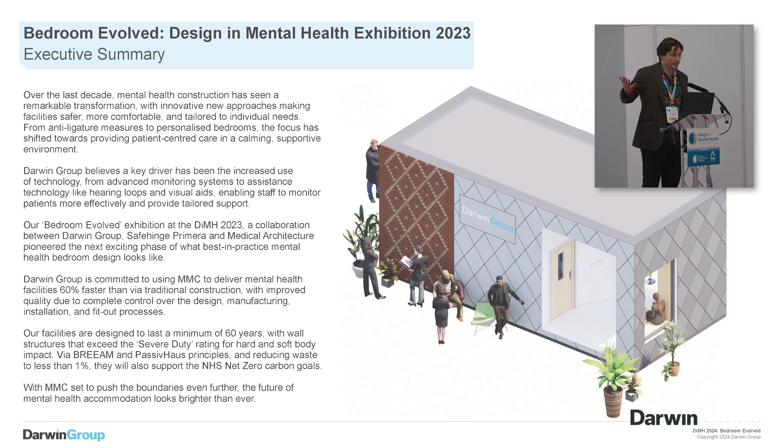We can provide this as a completely off-site build, which is not typically what we do, but is entirely sensible for the need. The benefits of fitting this inside one module that can be fully fitted out in our facilities in Shropshire and put on the back of the lorry and craned into site, saving vast amounts of time and ultimately getting much closer to patient care much quicker.

The interior of the room, we worked very closely with Medical Architecture last year, and I can't thank them enough for the brilliant input that they had in developing what is effectively still the blueprint of the design this year.

It was built on the back of the Procure Functional Single Bedroom Type 1 standard, and here you can see a very sketchy overlay of the Procure standard room in red and what we've now got as the colourful underlay underneath it.

So you can see that we're not really trying to reinvent the wheel here. We're not trying to do anything that isn't built on what is already a tried and tested solution. It's just about building it, delivering it and learning more from that.

This is, well, that's my hand. This is kind of the kit parts puzzle piece approach to what I'm trying to push at what we do at Darwin Group in terms of creating design and standardized designs where it makes sense.

I come from a background working in architecture, not working for a contractor. So I'm very aware of the limitations of working in an architect practice, but also the benefits we could have from a contractor side with a design instinct to develop spaces that de-risk and create standardized components where appropriate. We really see this as one of numerous standard components that we're currently developing, with the key idea that they are repeatable, we can de-risk them, and they're appropriate for the environment.

This is really how we see it working viably as an economic solution. The fact that we could deploy these very rapidly as a complete kit of parts that would very quickly create a ward environment of bedrooms. Not suggesting that this is how you want to arrange them, but potentially it's not a terrible idea.

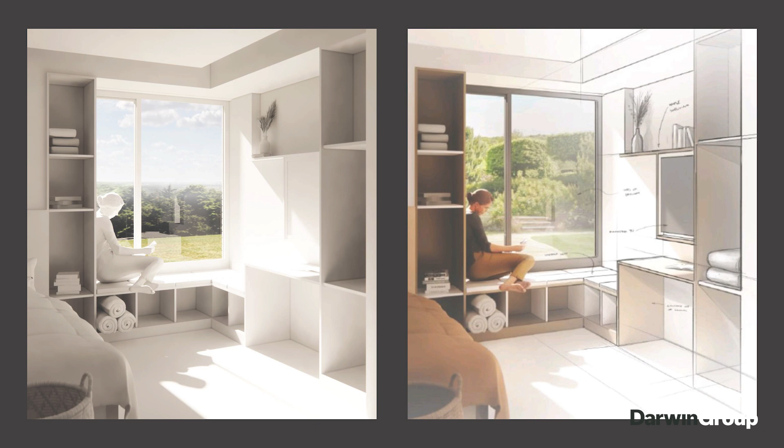Last year, this is a very quick sketch that I did that we used as part of the promotional material for the interior of the room, trying to get the look and feel of this space. I think a lot of what we did last year has been replicated in what we've done this year, which is why it was so heartbreaking to take it apart a couple of months ago. But it really shows the thought process behind what we're trying to do.

It's creating a calming, serene, appropriate environment for care.

This is us last year, this time yesterday, a year ago, bringing the module to site. You can see it was craned in with its little waterproof cover on and dropped into the site before all the other displays were created.

We took the cover off, and to be honest this is the first time we've done anything like this. Darwin don't typically operate by creating fully off-site solutions that we drop and move around the country. We would typically create a steel shell, insulated and waterproofed, that we drop as a module on site, then go down a more traditional route of building partitions and all the interiors.

And doing all the quality assurance testing. But for something like this, it makes perfect sense that what we did is develop this as a completely off-site solution. But we weren't quite brave enough to trust ourselves that it was going to go so smoothly.

So we left things such as the painting of the walls and doing the final bits of touching and detail until last year, until the final day of the exhibition. I think one of the benefits of doing this a second time using the same module is that we're absolutely sure of the robustness and quality of our module.

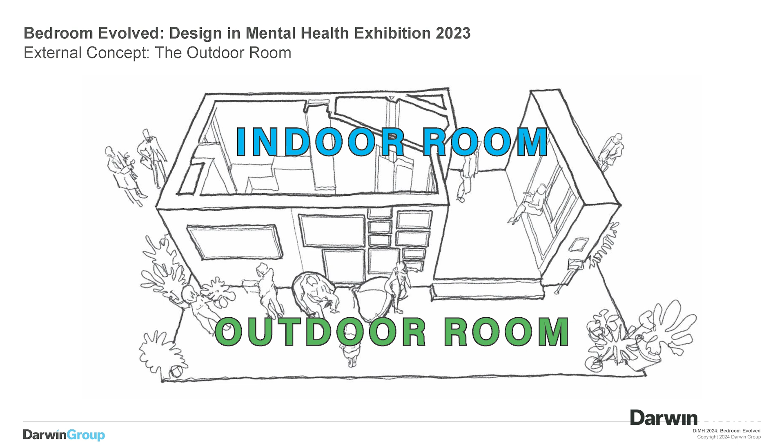Whereas Medical Architecture did a brilliant job developing the interior last year, me, my team, and Darwin Group as a whole were responsible for designing and delivering what is, I'm quite proud to say, a very high quality exterior. It looks brilliant, and I wish all the buildings I've delivered looked quite as good as that.

I'm also quite personally proud that I managed to get some diaper bond brickwork built on a building, however small it is, but I can tick that off my bucket list.

But the concept for this was really the outdoor room, which is not a new idea — it's effectively 100 years old, maybe even older. It was pioneered most famously by Otto Wagner, the great Austrian architect, when he developed his Steinhof facility, the first dedicated psychiatric care facility in the world, in Vienna, I think in 1903.

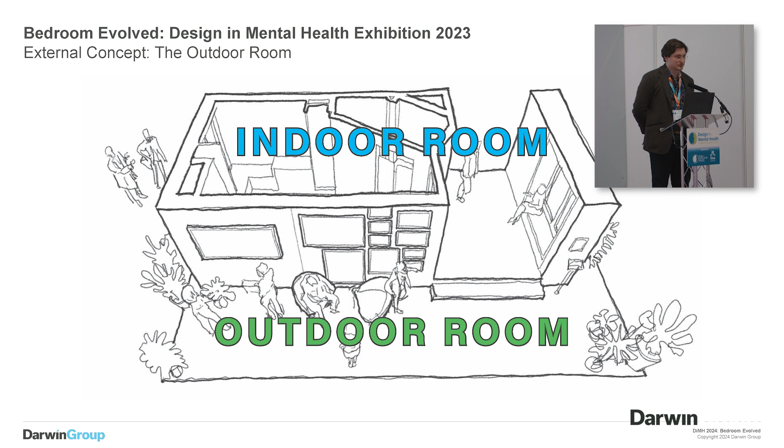His concept there — you think about the time it was created — was effectively pavilions, ward pavilions created in this really bucolic landscape, with the idea that you try and get the patient outside as much as possible. And of course that is a brilliant example to lead by, certainly one that's very fitting for how we think about design today.

So that's what we've tried to do across the two years this has been displayed — to create an environment that, although the inside looks brilliant, you don't mind dwelling around the outside of the building. Even though this is not in its intended setting outside, sitting somewhere in the UK or further afield, it's in an exhibition space with fake astroturf and fake potted plastic plants, but it still gives you that feeling.

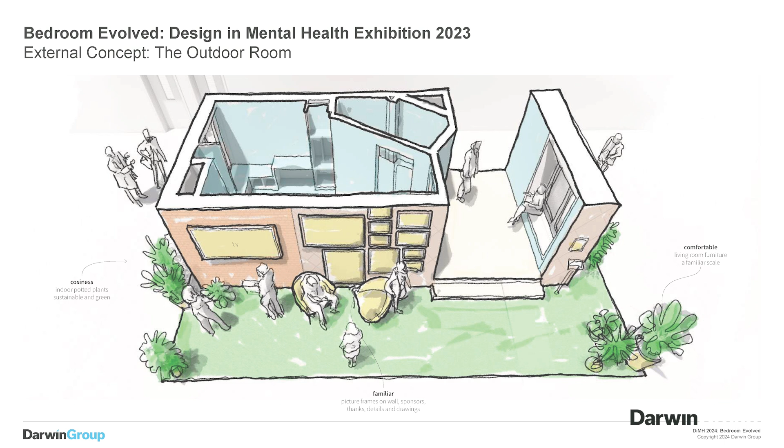And so this is a sketch that I did to illustrate those ideas. It's the coziness, it's the familiarity, it's a comfortable space — it's a space that you want to dwell and spend time in.

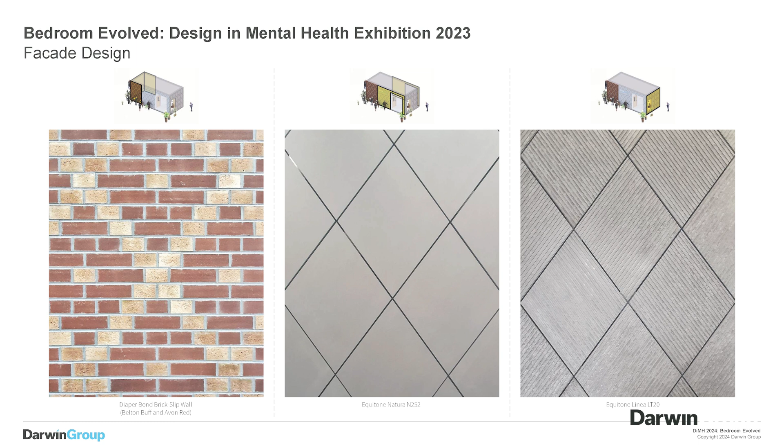And yeah, personally, this is my sort of idea of facades through the ages, to develop the idea of what Darwin Group do, which is not really prescriptive. We can develop a facade language and a building massing language that's really applicable for whatever the intended environment, whether it's medieval diaper bond brickwork through to modern Equitone or super format carved panels.

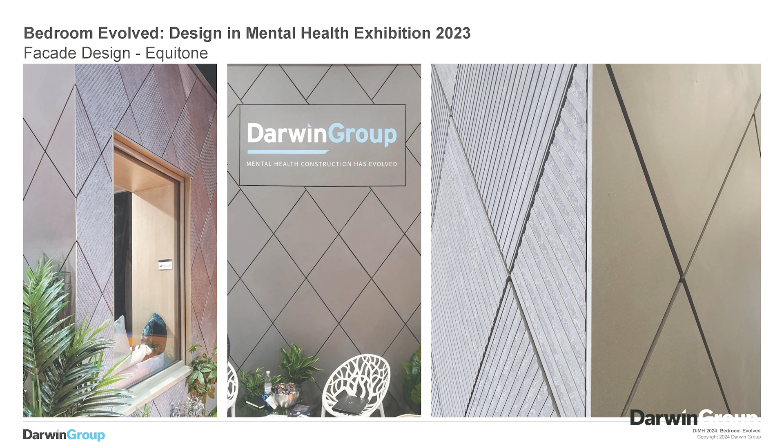Which do brilliant things in the light if you catch them at the right time of day, all day today. So these are just examples of what one side of the building could look like if you want to go ultra-modern, or another side if you wanted something extremely traditional.

As I said, we exhibited this thing last year, and over the course of the year we had over 400 visitors to it. To be honest, we were not expecting the reception that we got. I think it went down incredibly well.

But the most beneficial point for us was that people treated it like their home away from home. People sat on the bench, they sat on the bed, they dwelled and spent 5 or 10 minutes there, and they felt comfortable enough to really share what they liked and what they didn't like.

Those points were incredibly valuable. We got it from a range of people, everyone at the show and beyond, in terms of lived experience, nurses, estates managers, potential clients, fellow architects. The input was vast, numerous, and touched on so many bases, which is brilliant.

I'm so thankful for Design in Mental Health for having the show and all of us coming here to have that input, because ultimately what we got out of it was invaluable in what we did this year, and what I'll explain in a minute. I'm really proud to share back to the community in terms of evolving what good design looks like.

I put that note about the plants working well because we spent over £1,000 on plants last year, so it felt like we had to.

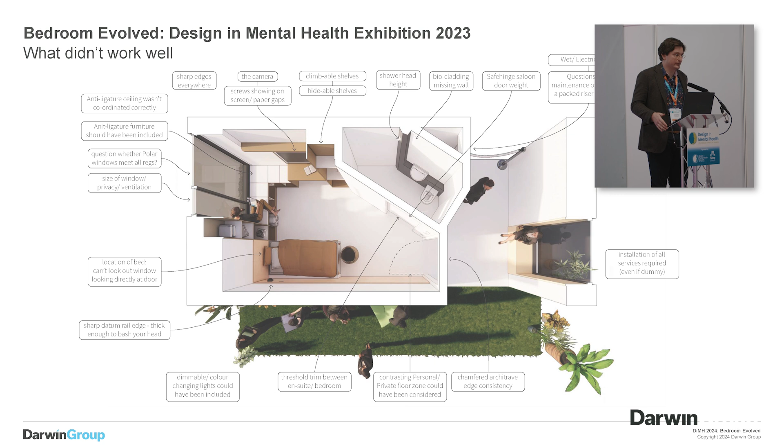But like I was just saying, the fact that they could dwell in these spaces and really got to grips with the detail of it, they had really pertinent comments about how we designed the space, and some brilliant feedback that, to be honest, the design team would not have come up with if it was not exhibited in this environment, really made us think about how we could do it better.

One of my favourite comments was about contrasting personal private space, extending the threshold of the corridor across the sweep of the door swing into the room, so that the nurse could stand in the space and the patient doesn't necessarily feel like they're intruding beyond their threshold. I think that's such a beautiful comment.

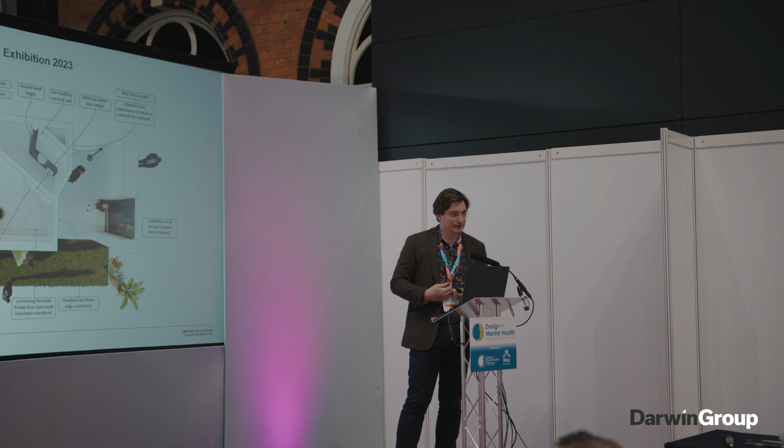It makes perfect sense, and it's something that is extremely easy for us to design into a bedroom space, but can potentially make a massive difference to patient care.

So after the show last year, well, to be honest, maybe 10 months after the show last year, we started to think about bringing it back, and did this post-rationalized sketch of what it looks like this year, and some of the features that we tried to implement.

Some of the main features amounted to basically ripping out the interior and just iterating it, and it really was iterative things. So the changes are subtle, but I feel like in terms of the detail and the level that we're really critiquing the space, it seems to be making a big difference.

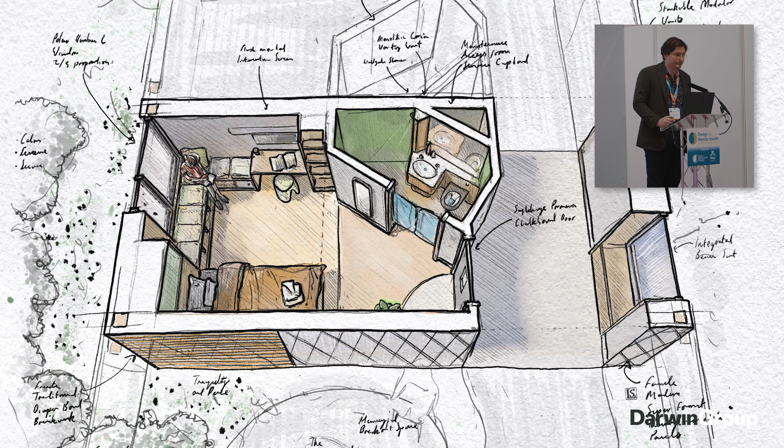And the feedback that we've had, certainly this morning, has been testament to that.

So the proposal for this year, we worked extremely closely with Tough Furniture, who also created the joinery last year, and had numerous hours of troubleshooting and brilliant meetings where we really put them to the test in terms of what was possible in terms of the design.

Tough Furniture were enormous throughout this. Apparently I was shielded from quite a few of the internal tough conversations, but they never told me that anything was impossible, and it turns out that we've done something really, really brilliant because of that.

So my key buzzwords for this year were serenity in the environment, a calmness, and really effectively that took on this kind of Japandi Scandi vibe to the whole thing, but it's a very calming, neutral space.

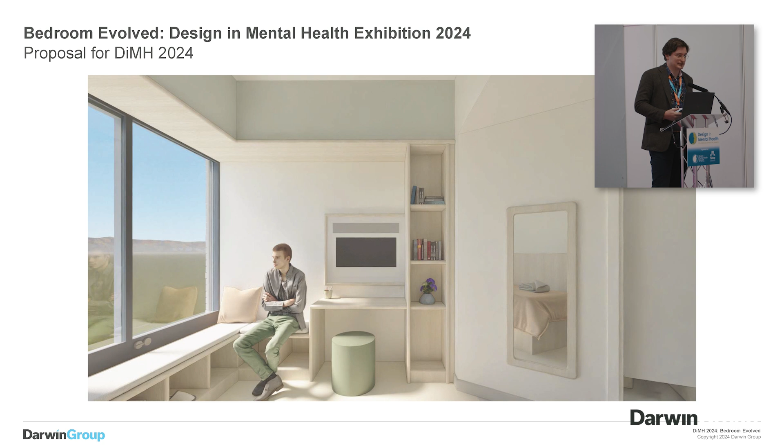That just follows on a lot of the tone of the feedback that we got last year in terms of wanting soft rounded edges, in terms of really celebrating the amount of natural light that comes through the space, reducing the shelving space and effectively simplifying and at the same time amplifying that as a design feature.

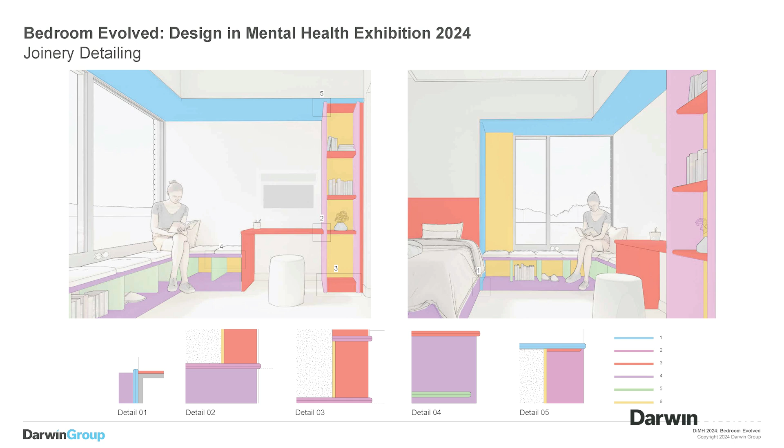So one of my favourite drawings through the process was this one, which didn't actually get used that much, but it certainly looks quite nice. It's just explaining the evolution of the joinery in terms of effectively 1 to 5 details of how we form this space. We managed to design it, and I'm quite proud as an architect that one of the best ways to create a minimalist space is to design minimally. So the majority of the junctions, I think there's only maybe two unique junctions, the majority of the room can be built out of these 5 details, which I think is just a brilliant thing that we managed to work and iterate through.

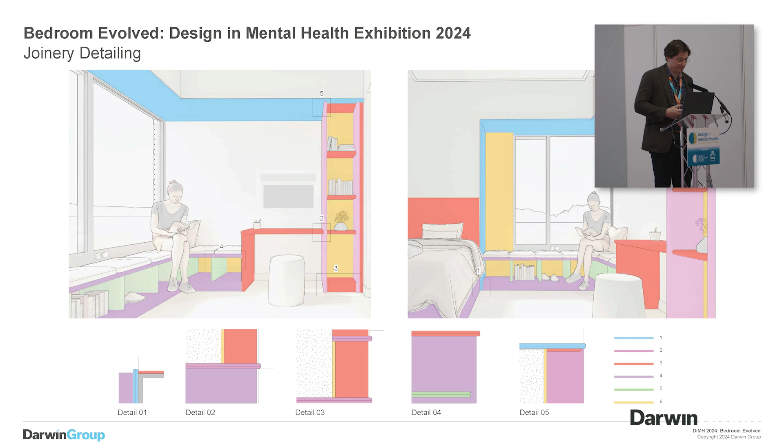I'm not sure if anyone's actually noticed that when they step into the room, but I like the fact that I know it's there. The colour coding explains the different planes, how this thing folds together and is layered together. Effectively what we have, and you'll see this in more detail if you go have a look at the room, is these different colour coded planes sit either 18 millimeters in front or behind each other. So they build up this subtle layering where it's very intentional how planes fold into each other and construct the space. I think that just helps elevate the sight lines across the piece. If you follow them, if you're flowing through, you understand how the whole piece fits together as a holistic thing that cocoons and wraps, which I really enjoy. I feel like it does benefit the space.

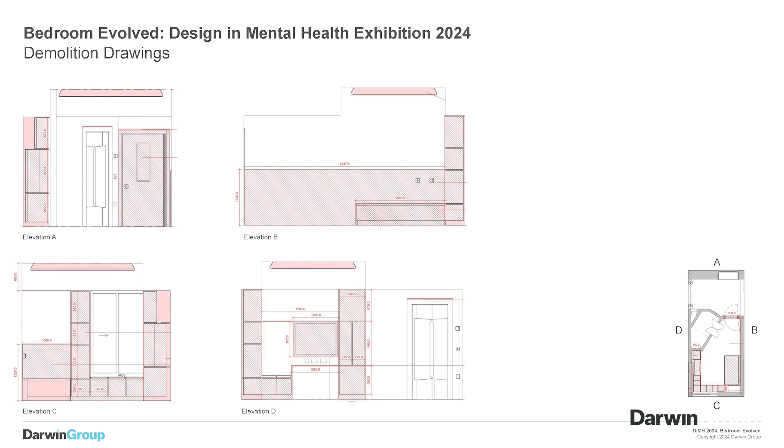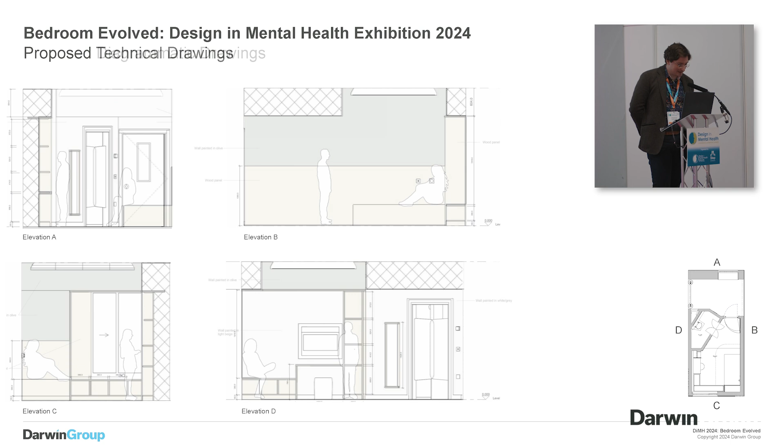So yeah, as I mentioned, sadly this is the demolition drawing. It felt really strange ripping out what was such a good thing, and for quite a while it looked an absolute mess after we ripped it out. I was really cautious whether we would be able to put it back as good as we took it apart. But this was the dream of creating that nice, serene environment, updating the colour coding, the palette, and ultimately trying to do what we said.

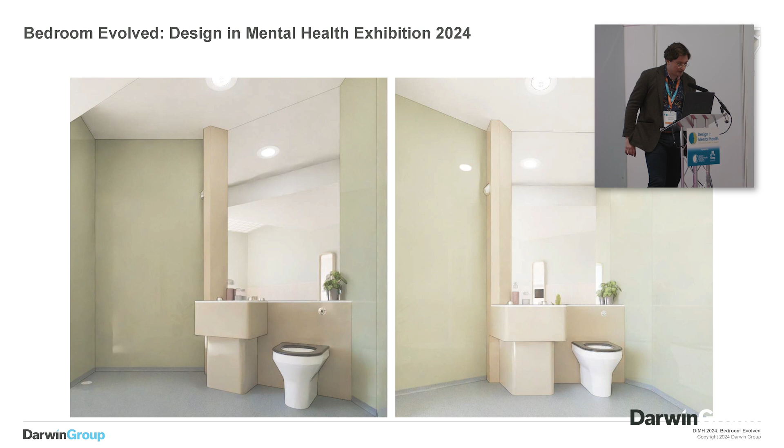These are renders of how we intended the finished bathroom to look. Just want to touch on the bathroom, which effectively we didn't iterate a lot from last year. What we did do is change the bioclad that's on the wall, the hygienic cladding, swapped it out for their beautiful vivid olive colour, and we also added a full height mirror. Of course, this is again a kind of trust specific option, but I feel like it does elevate the room, it makes it feel grander.

It's very voluminous. But we had some brilliant feedback about this as a design piece last year, in terms of it being a single surface combined vanity unit that has the sink, the toilet and the shower that could all be accessed and maintained from the riser space outside. Again, Trust seemed really receptive of that, in terms of it meant that they could potentially do a lot of maintenance work to these spaces from outside the room, again minimising potential harm and risk and disruption to patients.

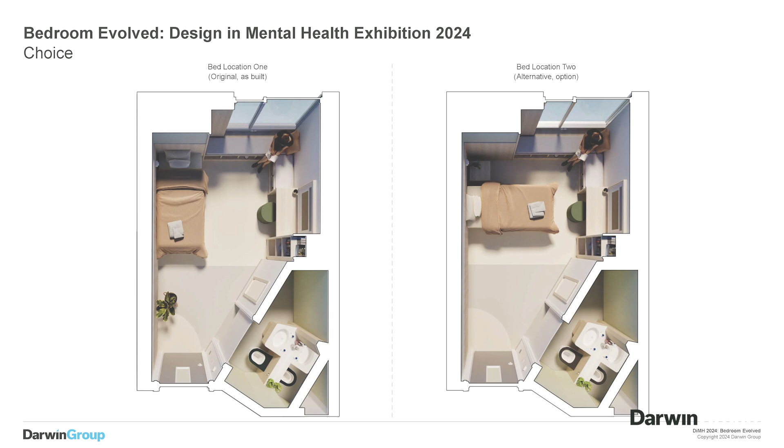One of the other points that we didn't build through this year but was a hot topic of discussion was the location of the bed. The one on the left is the original, and it's the same one that we built this year. It just works better in terms of how many people you can hold in the room, as we need it to do over the 2 days, today and tomorrow. But the one on the right is also an option. What's great is the bedroom doesn't necessarily need to be reconfigured further than just rotating the position of the bed to make this work. So again, it's a brilliant option, part of this standard suite that we're very keen to design through.

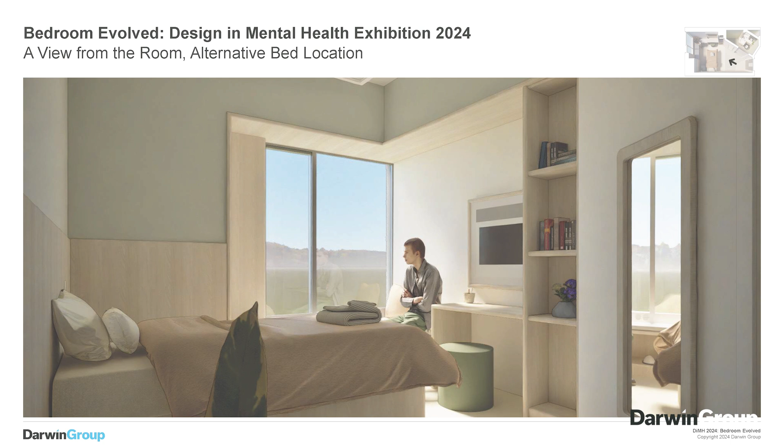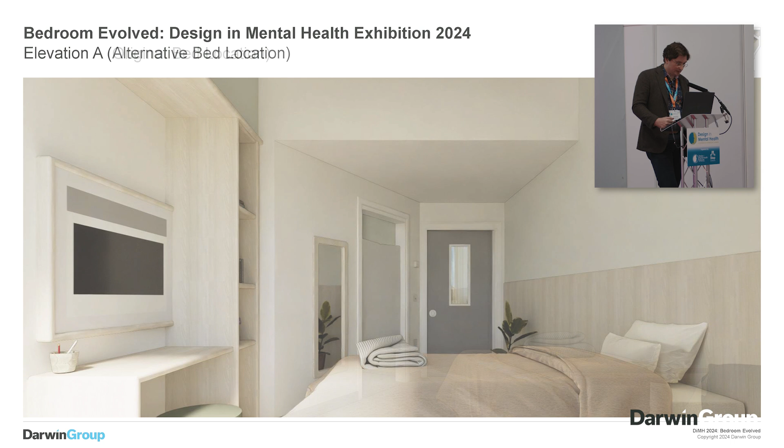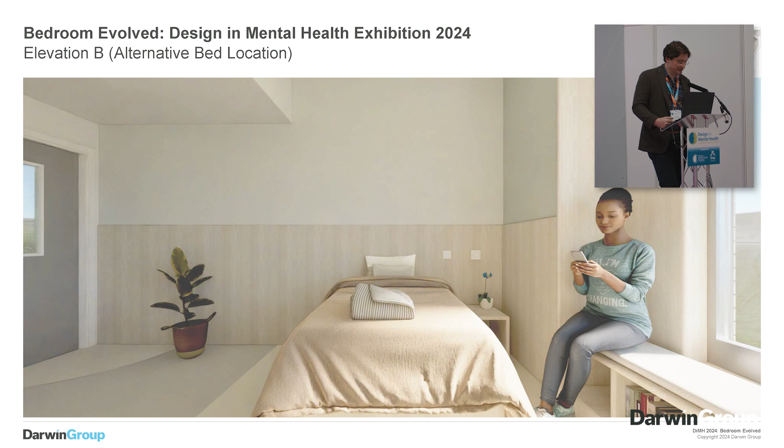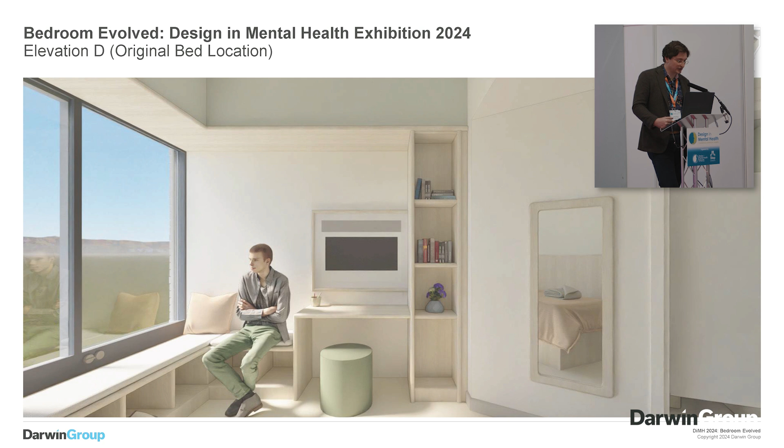And that is Bedroom Evolved. Thank you.

Yeah, absolutely. You can't see my mouse, but I can use this pointer.

It was that detail there on the edge of the desk, which we've replicated on the top of the TV cabinet. Tough Furniture have explained it to me about five times how they managed to do this, and it felt like the easiest thing for them, but I can't wrap my head around how they detailed it. It looks fantastic - a soft rounded edge on two sides meeting in a lovely rounded corner, with the laminate pressed onto it. It looks brilliant.

It's really satisfying to touch this space, and I think that's another part of brilliant patient care - we wanted the space to be haptic and responsive, to get that sense of touch into it as much as possible. It's so satisfying to run your hand across the edge of that piece of furniture.

On the back of last year, we've had quite a few interesting conversations with trusts, and done numerous feasibility studies thinking about rolling this out. By all accounts it was very well received and they're keen on doing it. We're incredibly keen on building this out because it would be fantastic to actually get out there and work with a trust to evolve this beyond what we've done as a group of designers, and understand how they would use it in their own environments.